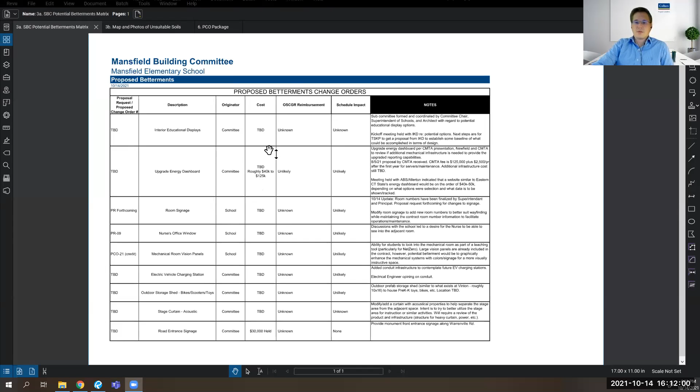So if you can see the betterment matrix up on my screen, let me know if you can't see it. Basically, every month we go over the items that are coming up insofar as additions to the project, that sort of thing. So running through this list, we have the interior educational displays.

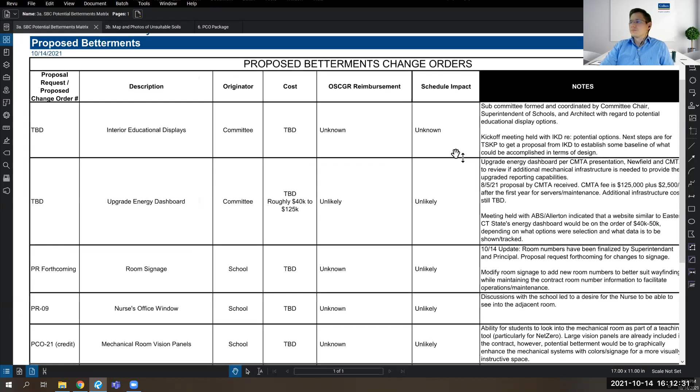A few weeks ago we had a kickoff meeting, and I think at the last meeting with this committee, we discussed getting an updated proposal from IKD to start the process of a schematic layout of what we might want insofar as educational displays are concerned. Richard, do you have an update on that by chance?

Yes, the next day I spoke with IKD. I told them I needed a written proposal not to exceed $10,000, which was the directive from the committee. I followed up a few days later. I still have not received anything in writing from them. I spoke with them only a couple days ago, and I was promised they would get it to me. So as soon as I get it, I'll turn it around and write an amendment to our contract to include their services.

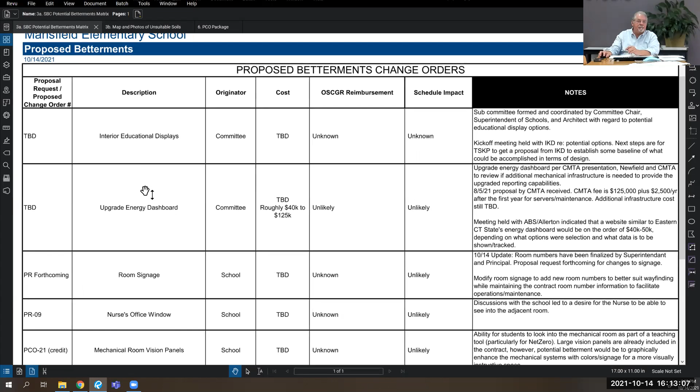Very good. The energy dashboard, we're still in the process of developing some of the end user goals and wants for what the energy dashboard might want to look like. So we'll be providing updates for that as we move forward.

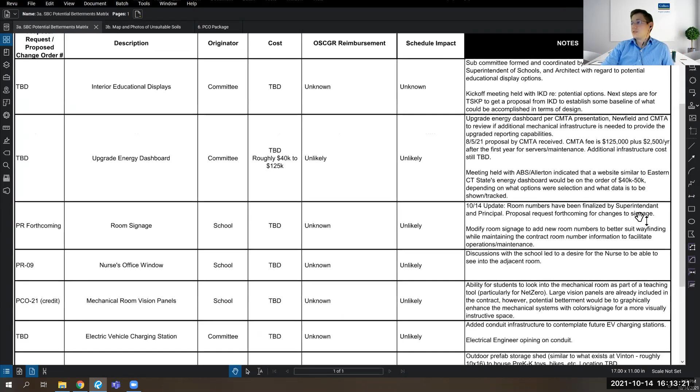Room signage, the room signage updates were finalized. So there's a proposal request being developed now by the architect to modify the room signage to better suit the wayfinding needs of the school. That'll be coming shortly.

The nurse's office window is basically getting priced out right now, insofar as adding in an additional window into that space so the nurse can better view the adjacent area.

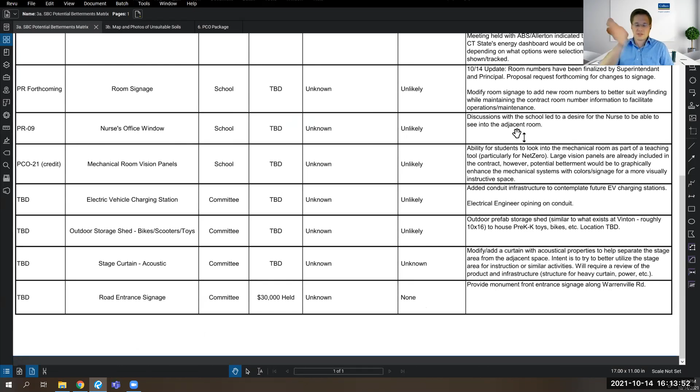The mechanical room vision panels - we talked about this as part and parcel with the educational displays. One of the potential change orders in your packets tonight is the first part of this, where we're asking for a credit back from the contractors for the very large windows looking into the mechanical space. We'll bring it back down to a flat wall, and as part of our discussions with IKD or whoever we decide to use for educational walls, we'll have that extra money to help develop some of that educational material.

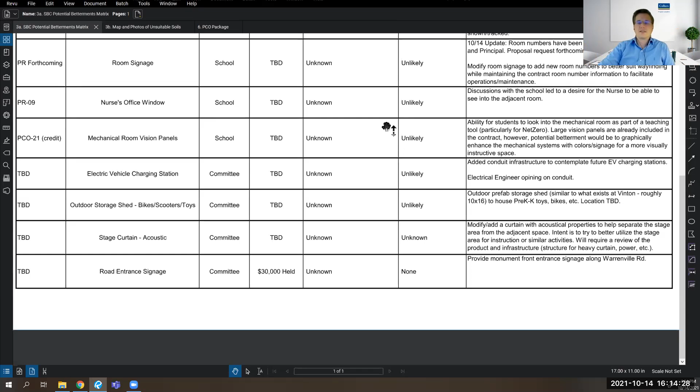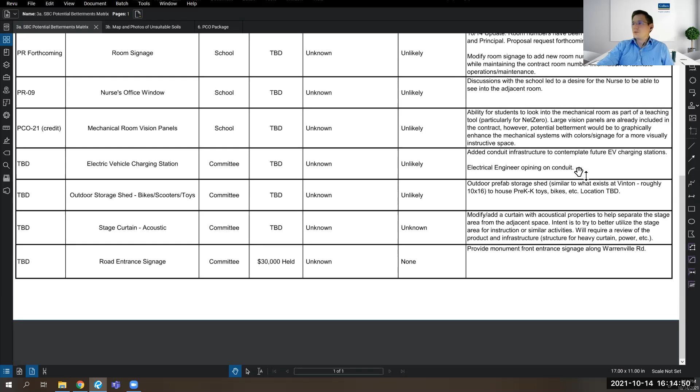The electric vehicle charging stations - this is still something we're tracking, insofar as what size conduit to put into the ground between the building and the parking areas for future electric vehicle stations. We're still waiting on updated information on what type of pipe sizing we want there.

The next two items are an outdoor storage shed for bikes and scooters, and the stage curtain acoustics. These are items we've been tracking for a few weeks now, and I'll be looking to set up a meeting next week with the superintendent, principal, and a few others to get a better sense of what these areas might mean and how we want to proceed in terms of pricing and scope. So by the next meeting we might have more information on those.

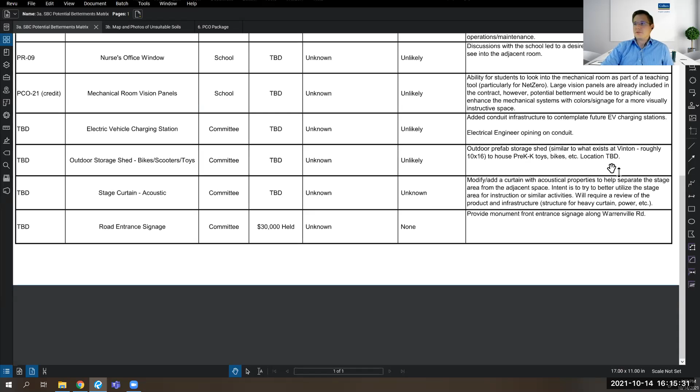A new item added to track is the road entrance signage. Some of the materials I got from Ryan were for the gateway signage that's been put in around town, and in those materials there are graphics about some of the other signs going around as far as aesthetics. There are also those two signs - I believe the email said they were $45,000 for both to be designed, built, and installed, to give you a rough general sense of what that might cost insofar as the monument sign.

Right now in financial tracking for the project, we've held $30,000 for this monument sign just to be on the safe side. So that's the kind of parameters we gathered insofar as data to help drive the discussion about what the monument sign might want to look like.

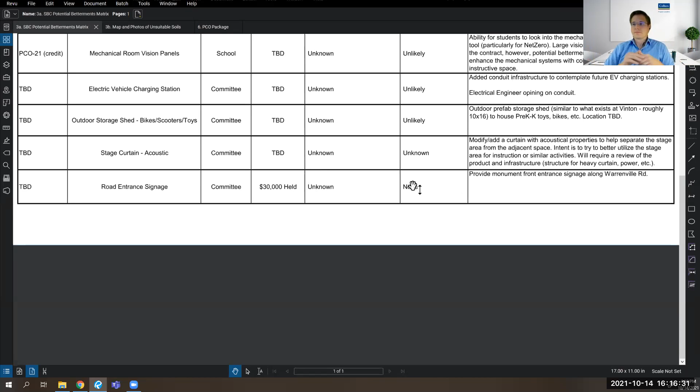Okay, we'll talk more about the signs a little bit later with Richard.

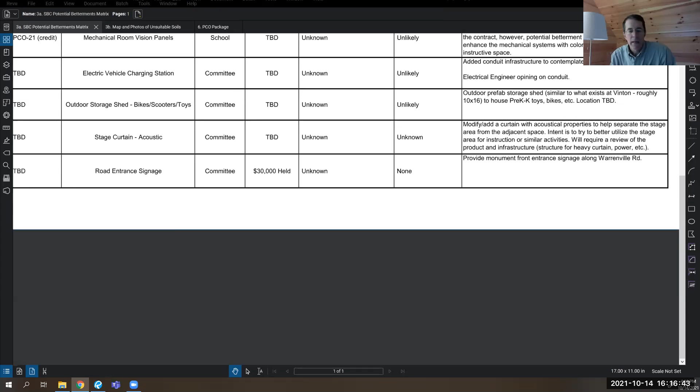Chris, again? Yeah. Kelly, I'm just curious about the numbers of the classrooms - are they the same upstairs and downstairs? Do they correspond?

No, we decided to go with a bit of a two-tiered system. There's a need for each space in the building to be numbered, so we maintained the numbers as designed on the plans for all kinds of reasons, and we decided to number the instructional spaces only, going 1 to 53 or whatever it is. The upstairs-downstairs thing doesn't quite work because the entire upstairs footprint is not downstairs - it just gets confusing for wayfinding.

So a room upstairs might be room 18, and downstairs the corresponding room above and below might be room 3.

Essentially what we did was stand at the main office and go to our left, which brings us to kindergarten, and started 1, 2, 3, 4, 5, 6 for the kindergarten rooms, then went into preschool. There are instructional spaces on each side of the hall - we numbered each of those and so on. We had about 35 or 36 spaces upstairs, then moved downstairs, started in the same location in the music area, and started with 37, going around the building.

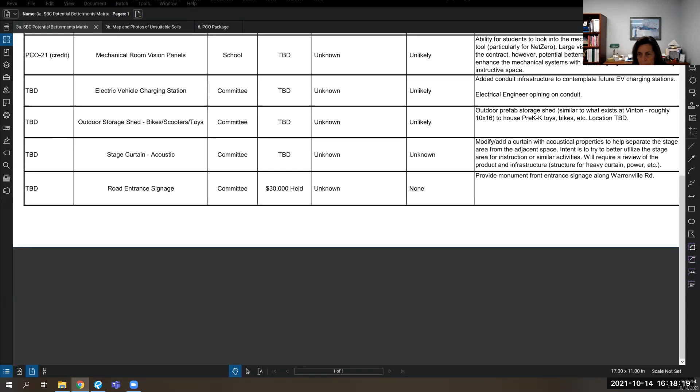Wow, okay. I worked in a building where that was done, and it really is more confusing - most people found it more confusing to direct people to a room. Sorry we didn't mention that ahead of time, but done is done. Okay, thanks.

Anything else on the betterments?

A quick update on the tree removal request for proposal. That went out to bid a couple weeks ago, and we had a pretty productive pre-bid walkthrough with potential bidders. I believe 6 companies came out and expressed interest and did the walk with myself. Those bids were originally due Tuesday, but we extended it to Friday for some technical language cleanup needed in the proposal. Tomorrow at noon is when those bids will close, and by the next committee meeting we'll have some numbers back to discuss how we want to move forward with the tree removal.

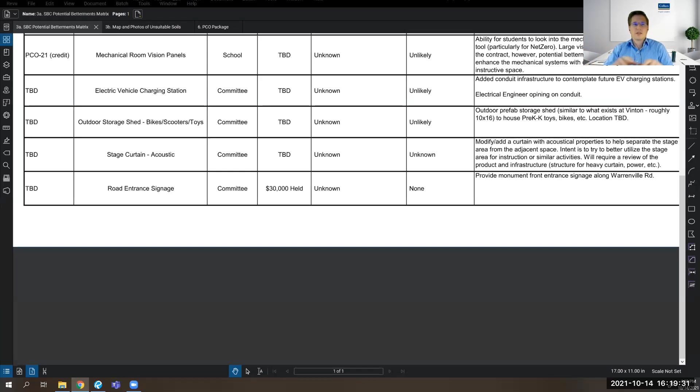The last bit I have is with regard to the unsuitable soils. This came up as something the committee had voted on 1 or 2 meetings ago, where there were some organic materials and soils that weren't suitable for construction found on the site and needed to be removed per the geotechnical engineer's recommendation.

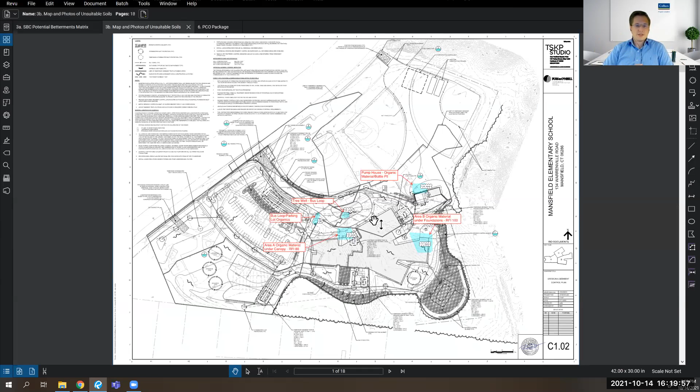Since then, there have been a number of other pocket areas that have come up with the same condition. Some are similarly located over at the front of the building near the bus loop and that original area, the front entrance. A couple of areas are over at the other portion of the site. One was near the pump house, and another, most notably, was near some areas of foundations that had been poured. I can show you some photos here as I scroll through.

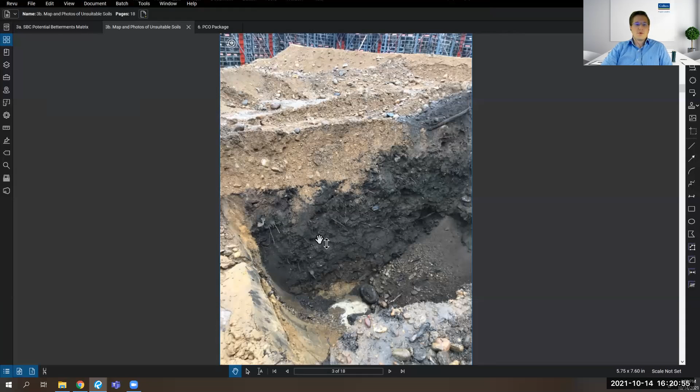So it's largely this black topsoil that might be good for planting things, but not good for structurally bearing your building upon. You can kind of see as we go through the photos where it's either dark soil or has tree roots and things of that nature. All that needed to be pulled out and replaced with good clean fill so we had something sound to build the footings, sidewalks, and that kind of thing.

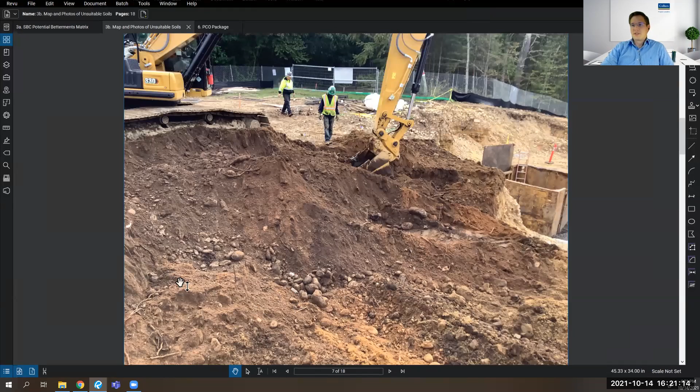In a couple cases we even found, during a pre-construction period, old bottles from 50 years ago dumped in sort of piles in some of those spaces.

So there are two scopes of work that come out of this. We had hoped to have some of the numbers in time for this meeting, but we couldn't get them pulled together in time. There'll be a number of change orders coming through for remediating this soil, in line with what the committee reviewed a couple weeks ago, insofar as just taking out the soil and putting it back. So there'll be some change orders in effect to alleviate and remove these discovered soils.

There's another situation at the portion of the building on the southeast side, which I'm pulling up here. Scrolling through, some of the foundations that had been poured had organic soils noted that were deeper than expected, but still within the realm of impacting the foundations. This was discovered because there had to be a bigger pit dug in the same general vicinity as the foundations, and as they kept digging down, they discovered these soils existed.

So those also need to be remediated at the recommendation of the geotechnical engineer. Some of the foundations that had been poured needed to be removed so they could get the soils out of the way, put back clean soils, and put the foundations back.

We're still waiting on the final reports from that exercise from the geotechnical engineer and the testing lab. But as these items have come up, we wanted to put this in front of the committee so you're aware of what's going on. So far, this doesn't appear to have impacted the schedule in terms of dates or anything like that. Newfield has been doing a good job moving parts and pieces around and utilizing materials to avoid impacting overall workflow. But like I said, some change orders will likely be coming through at the next committee meeting to address these discovered soils.

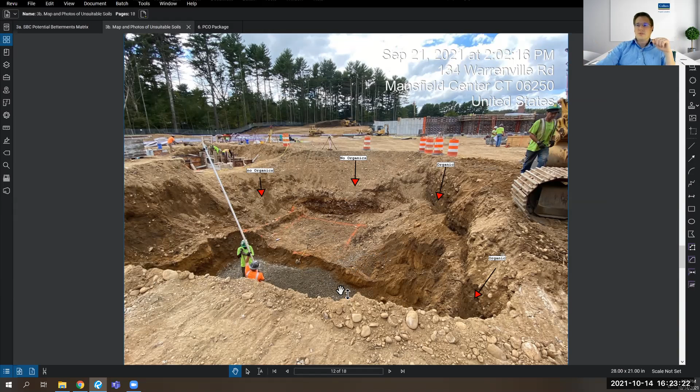Randy: Yes, go ahead, Tony. Tony: Does anybody know where these soils came from? Did they reflect—I mean, have we been doing archaeological research in this area? We did something very early, but I'm wondering why there are organic materials so deep under the surface of the ground.

I can speak to that a bit because we've been in contact with the geotechnical engineer. His initial findings, from both being on site and looking at some old historic documents, indicate there were a number of construction efforts and development on the site. I don't know if this plan shows it, but it shows some grading and where there might have been construction access. Over the past, say, 100 years or so, there have been a number of additions where the soils and grading have been changed throughout the site, so there are different layers that have been moved around and placed on top of one another. There were soil borings done that go down and examine the soils—we did those before we started the site, as is typical. But in the location of the building, the borings didn't observe the particular conditions we're observing now.

It's in this corner, we just didn't happen to do a boring because you can't test every single particular location. Same thing with right here in front of the building. It appears, especially in the case of bottles, it might have just been where there was some extra soil they were clearing out of the way. They didn't know a school was coming 50 years down the road, and it was fine at the time. But this is some of the substance we want to get out of the geotechnical engineer's report, to identify what happened and give us their official take on the matter. This is some of the phone calls we've had to give some color to it as we go through the process.

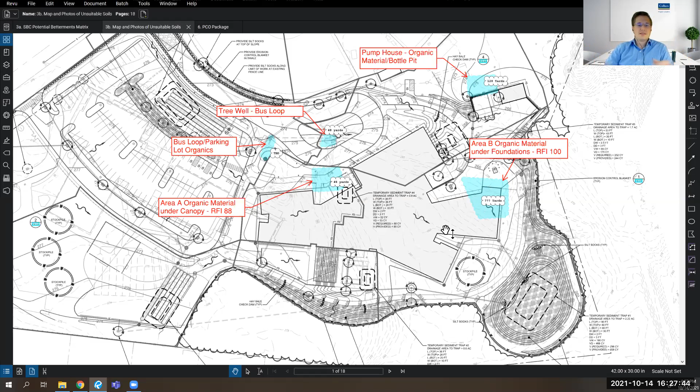After we discovered the area in the building foundation, that triggered a much more scrutinous review of what's going on before we start building the rest of the building. So the geotechnical engineer had additional test pits dug, especially in area A where we haven't dug yet or done the foundations, and in other areas throughout the site, to confirm we don't believe there's an issue with the soils within the building footprint that would affect the foundations. And then outside the building footprint, obviously there's more parts to the site - sidewalks, etc.

That's something Newfield has been looking to get some direction on, so we can drive this forward and not panic every time we dig down a little bit and see some soils. The question for the geotechnical engineer is - is there some level? Okay, if you're just having a sidewalk, as long as it's clear 3 feet below, it doesn't matter what's below it. To your question, that's what we're looking to get some better clarification on.

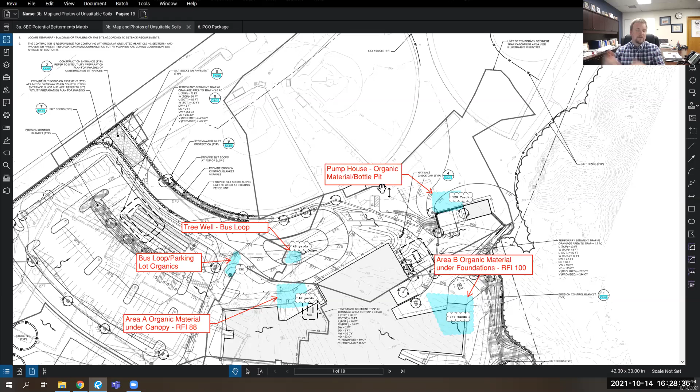Because it seems there's some matter of depth below the base of foundation walls, where just because it was fine at the bottom of the wall doesn't mean you're fine because of it. That's okay, but you're asking the right questions and looking for the same information, so thank you - exactly the same thing. Yes, and so we believe we've cleared the building now, and now it's just the rest of the site, so we're not going at this ad nauseum for every bush and planter until the end of the project.

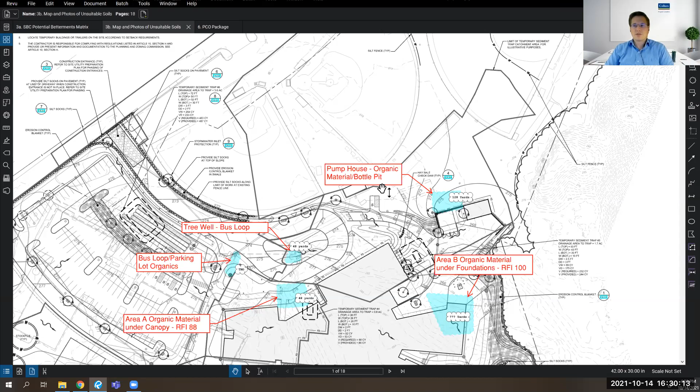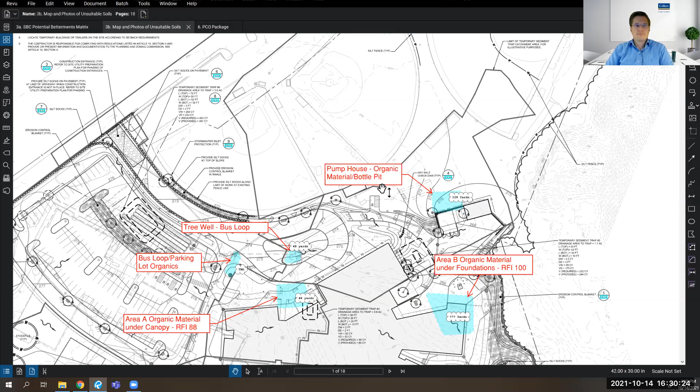Anything else on the unsuitables? Otherwise, like I said, we'll have items to act on and review at the next meeting. All right, seeing none, Adam and Scott, is that the conclusion of your report for today?

Okay, then that brings us to the architect's update. Richard or Jeff, who's going first? Sure, I'll start. Adam did a very good job explaining the unsuitable materials that were discovered.

We've been asking the same questions they've been asking, and Tony has been bringing up what's the history of the site. We're not that concerned about burying unsuitables if they're deep enough under paved areas and sidewalks, and we're looking for the geotechnical engineer to make sure we have adequate cushion of suitable material on top of the organics. But when it came to the foundations, we were very concerned.

Newfield did the right thing. They pulled out the footings that were on top of the organics and are in the process of placing new footings based upon my observations. They probably have already placed concrete when I was out there on Tuesday. It looked like they were ready to do that. So all the proper steps are being done.

I have on the agenda in front of me, under my item, school entrance signage along Warrenville Road, but that's already been addressed, I believe, in Adam's report. I do not have anything to add. I know there's been an RFP issued for signage for various town sites, part of an overall signage program.

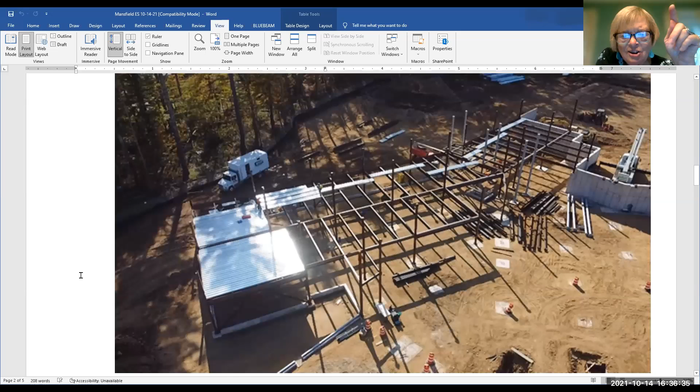Could I make a request? Could you tell us where on this image the cafeteria is, that will help me orient. I'm still having trouble getting oriented.

The cafeteria is in area B, right in this area I believe. Go up to the first image. I can help you out. Right here - to the far right, toward the front, is the gym. Right next to that is the cafeteria, to the left. Outside of that retaining wall would be the outdoor dining area.

To the left, next to where the footings are about to be poured or just were poured, is a classroom wing on the east, part of the B wing - one of the L's. That rectangle in the middle is a stairwell. To the left of that is the other L-shaped classroom wing, and then to the back is the music classrooms and the art. It's cropped at the top, but beyond that will be the A wing, which will be the pre-K, kindergarten, administration, and the main entrance to the right at the top.

So this is basically about two-thirds of the building? Yep, this is the two-story wing. Look at the size of it compared to the pickup truck - that gym is going to be very large.

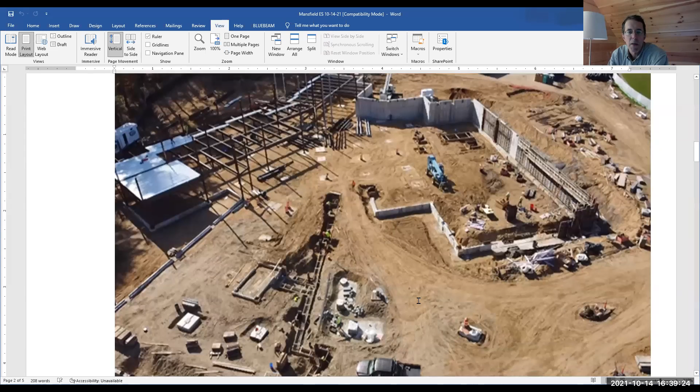I understand the orientation, what I'm curious about is around where I imagine the stage is - there's a structure of two squares and a large rectangle, it looks almost like a pyramid shape. What is that? Oh, he's talking about the formwork in the ground there, the two squares. I believe that's part of the mechanical room where you step down into it, correct? No.

Unfortunately I don't have a zoom here, let me grab the plan quick while you're going through that. To the right up there - that stuff, what is all that? I can't see it too well, Chris. This is the stage there, you're on it. Yeah, I'm just wondering why it's set that way.

I know we got a pier - I'm not even sure if this might just be a pier box that's ready to be set somewhere. This used to be their whole staging area, which they're moving up here now because they're getting ready for this up here. It looks like the actual stage is going to be towards us of those two squares anyway, and that's still the mechanical room in there, in the back.

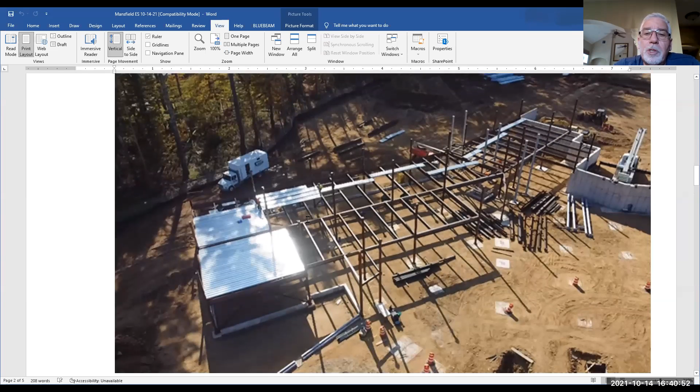So going back, this is the westerly part of B wing. They've started doing the decking on the main level, and the steel for the upper level is coming early next week.

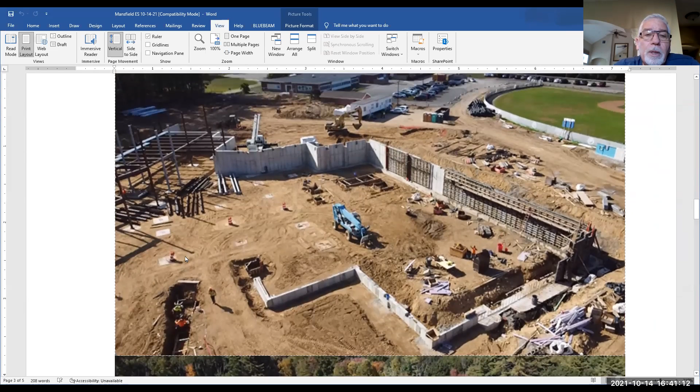They have all the steel for this area, which is in their shop, and they'll be bringing this out next week in preparation of setting this after we get 75% strength in our concrete. They also have the area, the 2-story area in the back of the C area, which they'll be bringing out next week as well.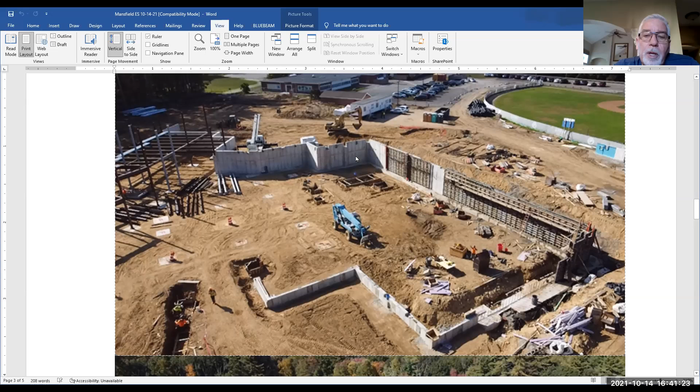This is an aerial view of the geothermal field. They'll be done drilling this week. They started doing piping today, and they'll pipe everything into a concrete vault where there's a manifold, and then there's 2 pipes that run to the new building.

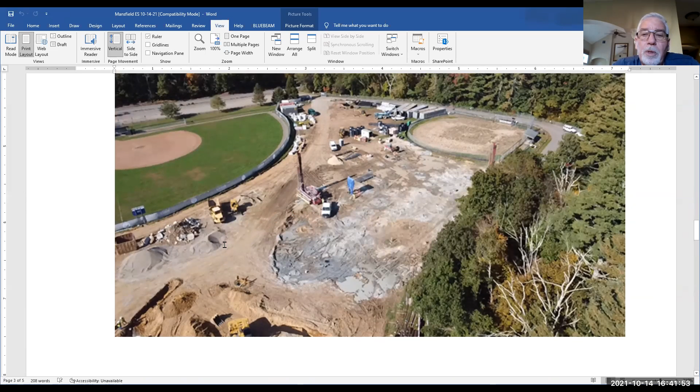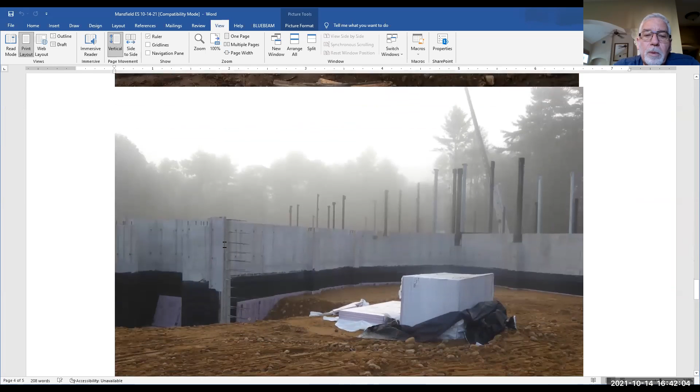That's just a shot from the rear. And this is going to be, they're backfilling the foundation walls now, waterproofing and backfilling the walls in preparation of foundations for the admin area, section A, on the main level.

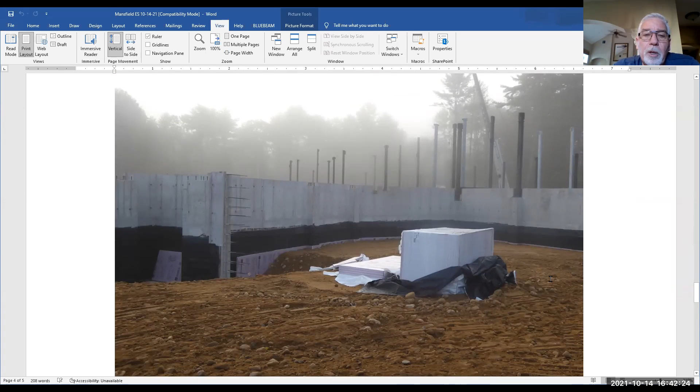And this is our mock-up that we're building. This was done last week. We have the foundation retaining wall mock-up, and then we have two wall mock-ups here. One will be a metal panel mock-up, and one will be an Ipe siding sample.

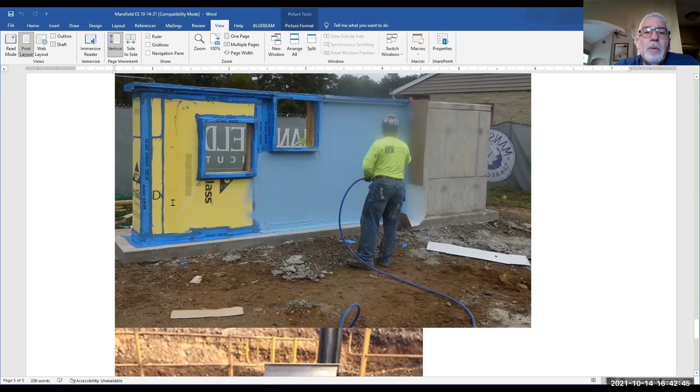Al, those pictures really, the aerial pictures in particular are good. And I'm curious if Kelly, do we have any way of putting those on the website? Or is it really just, would that be of value, do you think? Kelly, I think is on another call.

Yeah, Kelly's on another call. Put a message in the chat. She'll be returning, but she had to step away for a few minutes. We should be able to add those. Don't you think, Ryan, that they're something that would be worth doing? Yeah, we can do that. We've got the time lapse, we got the live feed, we can put in some pictures of various stages along the way. And I think you need to include Al's artistic shot there with the morning fog.

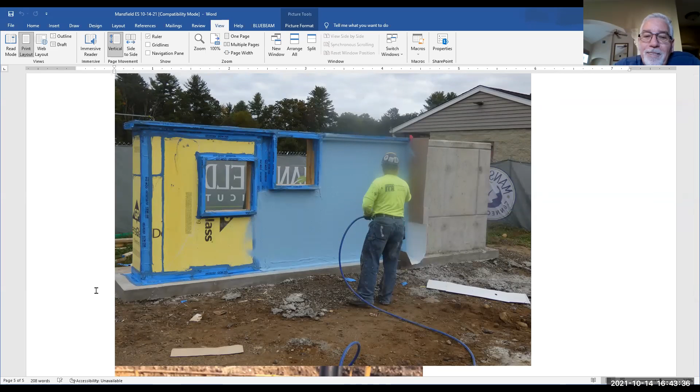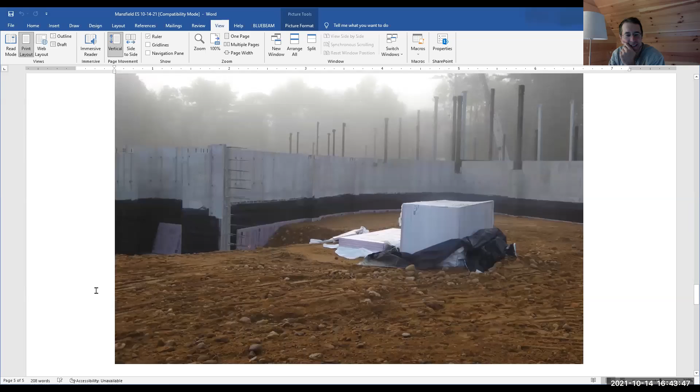With the what? Make sure the guys are wearing helmets. You just went right into the foundation being this and that, and you didn't acknowledge the aesthetics of it. Go scroll back up. It's just a very nice one. There you go, got some atmosphere. See, that belongs in one of your construction journals. But great pictures, it really is terrific to see. And again, those aerials are fabulous.

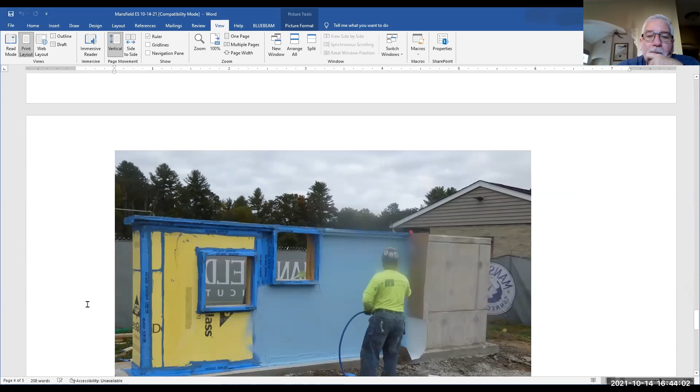And then this is the fire protection pump well that's installed now. And this is the footing for the pier that will support this whole side of the pump house.

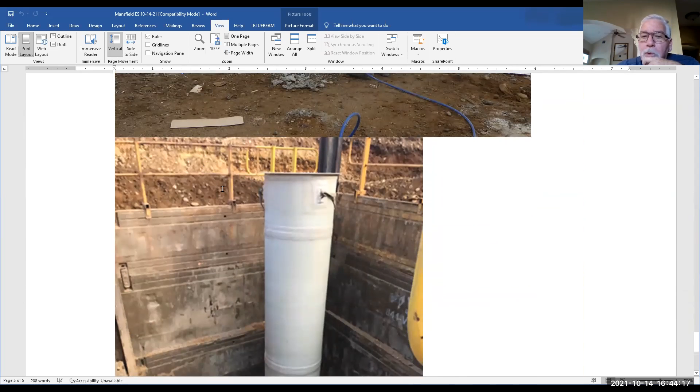So this is proceeding good. We need to connect this pipe to the fire protection tank. It needs to be inspected by the town, and then we can backfill this. They're starting the pier tomorrow, so this should be complete and backfilled by next week.

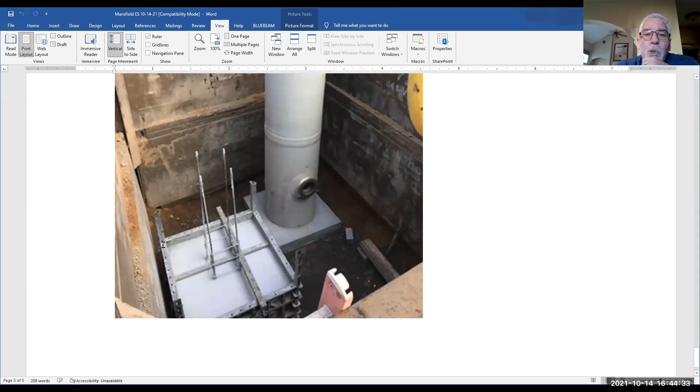And that is all for pictures. But I've been sending Kelly these pictures after every meeting, so I'll send her these as well.

Questions for Al from the committee? Okay, all right, well then, thanks, Al, for that update. You're welcome.

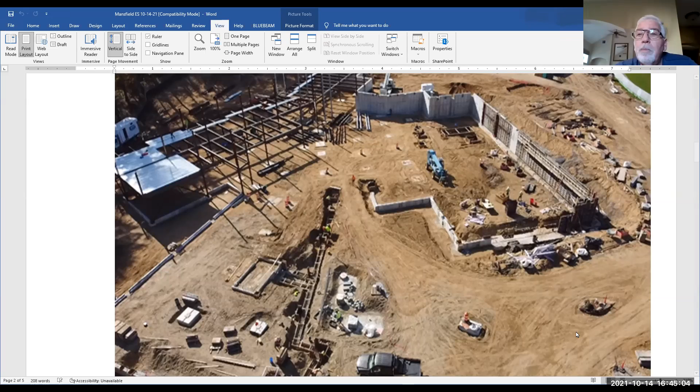Potential change order review. Yes. So we have 4 potential change orders ready for this evening.

The first one is for storm damage repair. So this happened a couple of months ago during one of the early storms where some trees fell over and damaged some fencing, and we needed to haul the trees off. So that's the substance of that change order for $1,100.

The second change order is for a concession stand roof drain tie-in. So basically, when they had a design for the stormwater system, some manholes needed to shift based on some piping that was discovered in the ground at a different location. So this is just $265 to tie in the storm drain because of the discovered condition of the utilities.

And the next 2 are credits. The first one is, as I mentioned earlier, a credit for eliminating the 2 large window panes from the corridor into the mechanical space, so we can apply that money towards different elements of the building for educational displays, what have you. So that'd be a credit of $2,350.